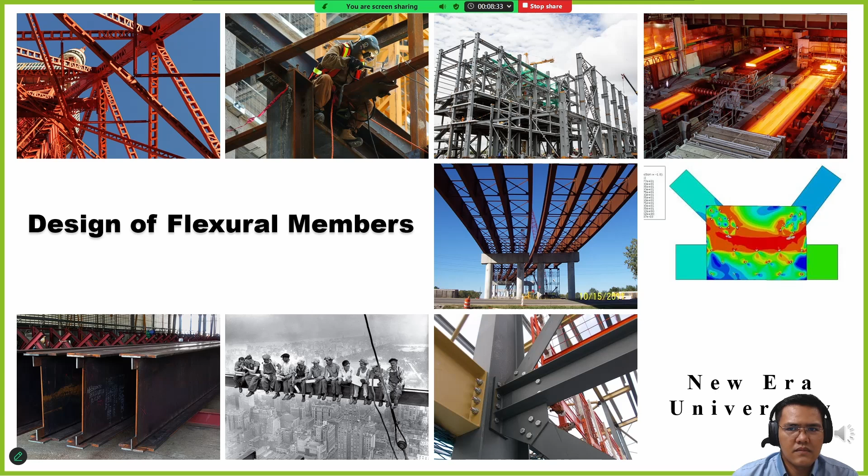Okay, design of flexural members, these are our learning outcomes for today: differentiate the elastic and plastic analysis, classify a given section as compact, non-compact, or slender section, understand the different limit states for flexure or modes of failure, calculate flexural strength considering bending at major axis, bending at minor axis, and the combination which we call biaxial bending. Also, we would try to calculate shear strength of a beam and do some serviceability check, which is a deflection check for a given beam.

As mentioned, this topic is quite long, so we would divide it into two sessions. Part 1 would possibly cover up to major bending, flexural strength considering bending at major axis.

So let's go to the code provisions. In terms of NSCP 2015, design of flexural members was presented in section 506. These are the different provisions or subsections included in this section. As you can see, there are many, and it was annexed depending on the section or shape, and on which reference axis you will bend.

For example, on 506.2, it says doubly symmetric compact I-shaped members. So your section must be doubly symmetric, I-shaped members and channel, applicable too, but bent about their major axis. For other examples, point 7 is square and rectangular hollow section, while point 6 is bent at minor axis. That's how it's defined in the NSCP code provision.

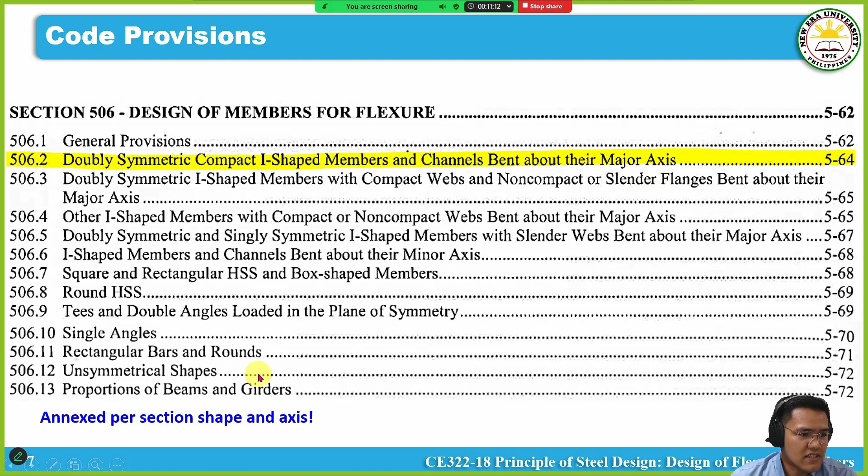Now, to simplify our discussion, so we can finish quickly, we would focus mainly on 506.2, which is doubly symmetric, compact I-shaped members and channel bent about their major axis. In particular, we will focus on W-shapes since that's the one usually used.

Now we have a table here showing, as a guide for designers, what provision applies. This is like a summary of the table of contents we showed earlier. You can see on 506.2, there's I-shaped channel, with description in terms of slenderness of flange and web, and there's a limit state that you should check.

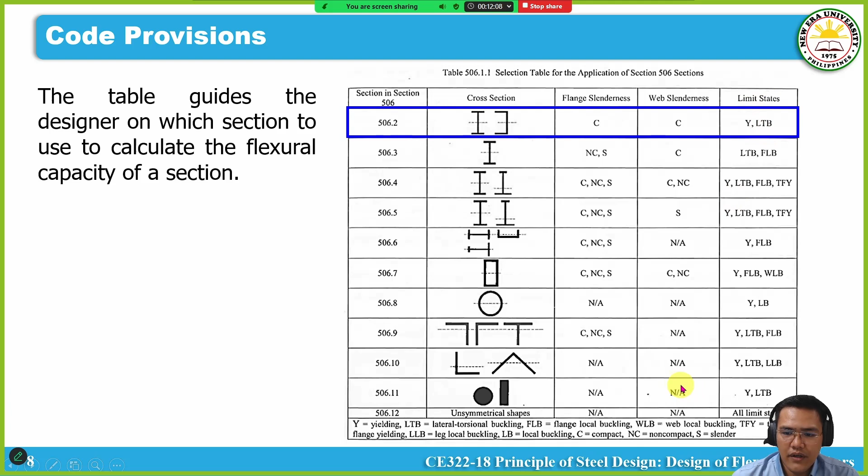So it appears that for 506.2, the flange must be C, which means compact, and the section must be both compact, and the limit state that needs to be considered when checking under 506.2 is Y, which corresponds to yielding failure, and LTB or lateral torsional buckling. We will discuss and detail this topic later.

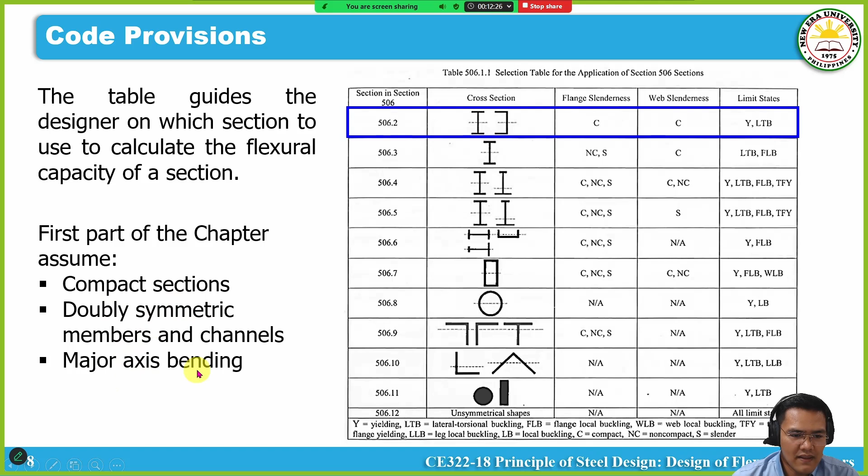So let me repeat: our assumption for this first part of the chapter is compact section, doubly symmetric members, bending would be on major axis.

In terms of shear, although in this second part it was included in section 507, it follows right after. These are the included provisions on checking against shear.

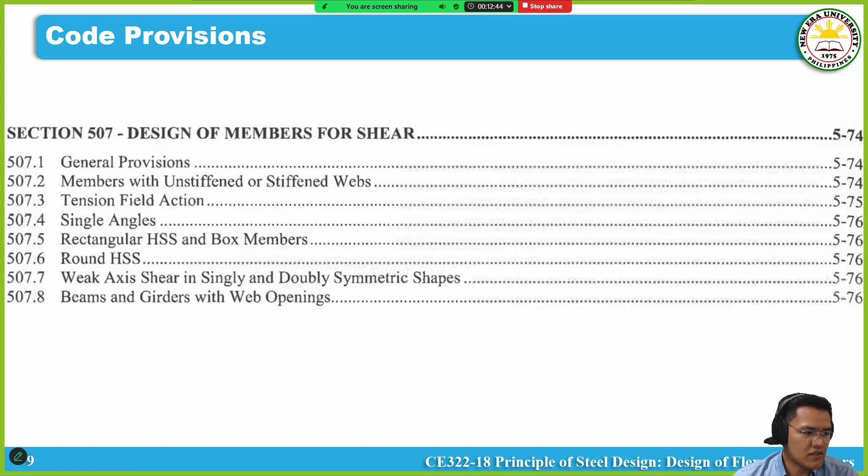Now let's go to bending at major axis. So beams as a flexural member, for example we have a simply supported beam with any random load applied. The usual case is you have moments and you have shear. So it is usually appropriate that when you design a beam, you design it not just against bending but also on shear.

And the beam, as a basic definition, is a structural member that usually supports transverse loads. Meaning if the longitudinal axis is in this direction, the loads are applied perpendicular to the longitudinal axis of your structural member. Usually, it's subjected primarily to flexure or bending.

Now, we have mentioned in the past chapter that it's not only bending that can be possibly subjected to our structural elements. It can also be introduced to axial load, in which case we call it a beam column. So we also have a specific chapter for beam column. But for now, just to emphasize, we would discuss pure bending or pure flexure in this chapter. So moment alone or shear alone is our checking for now.

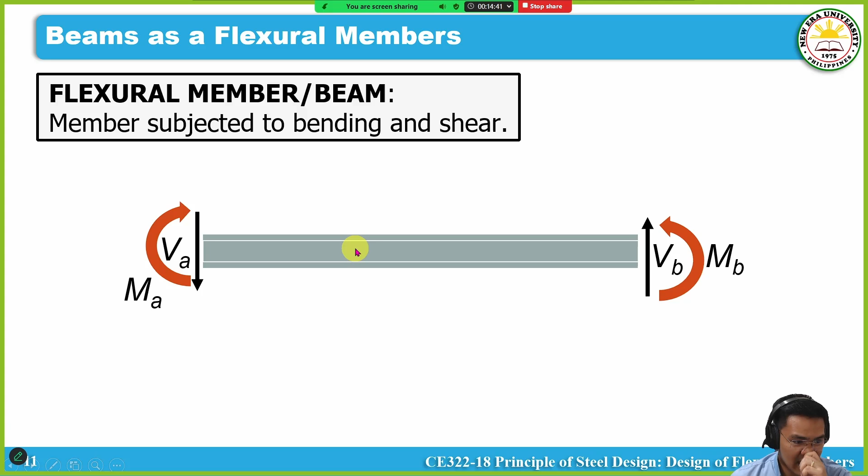Now, there's a lot of terminology that's used interchangeably with beams, but these are the usual terms we use. It depends on the function. So for example, girders are basically beams supported by columns, and usually girders support our secondary beams.

We also have joists, like in trusses. Stringers are used in stairs - the inclined structural members supporting the steps are called stringers. Lintels are for openings in building structures, like doors and windows, so we usually place beams there to carry our CHB walls.

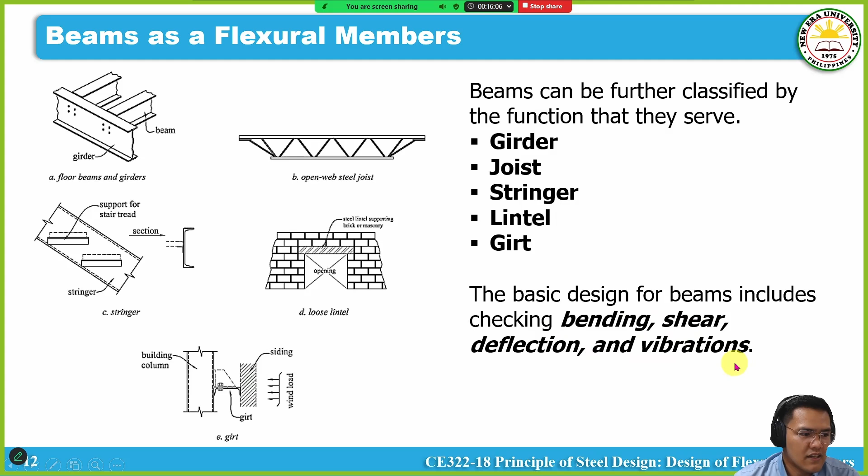Now, as we have mentioned, we would focus on W-shaped sections - the AISC rolled section. It has advantages if we use this as a beam, mainly because it has a lower cost compared with the built-up section, primarily due to additional fabrication cost - you'd have to weld built-up sections since they use plates. It's usually used for flexural members and for axial members.

There are cases with combined axial and bending, so you can also use it for columns. Basically the section is doubly symmetrical, with a strong x-axis and a weak y-axis - our wide W shape section.

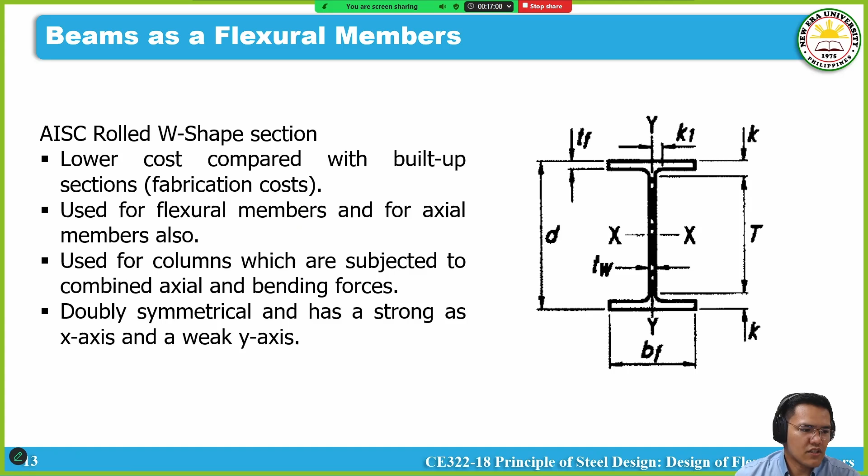Now, in terms of analysis, we have two usual approaches: elastic analysis and plastic analysis. Going back to the stress-strain diagram we discussed, the first part, which is under the elastic region, is usually what was discussed to you, and even the analysis in your lower subjects falls into elastic analysis.

Basically the assumption in the theory is that the stresses acting on your members are limited to the yield stress, FY. So once FY is reached in your system, that's it - it stops there.

But in reality, you can still add more load - it's not yet collapsed or at its ultimate, not yet the end of the world. You can still add load. So when you add load after this elastic region, you fall into a plastic or inelastic region.

So the counterpart of that would be plastic analysis - if you use what we call the maximum possible, or mobilize the reserve strength of the section. Usually you can add 20% more than the load applied to reach the yield stress limit. That's what happens in plastic analysis.

Another term here is collapse mechanism, wherein you continuously add loads such that the capacity of your structural system, or any component of it, would collapse. Usually it would form what we call a plastic hinge. So it's not just limited to FY - you can add additional load to mobilize the reserve strength of the given section until all fibers yield.

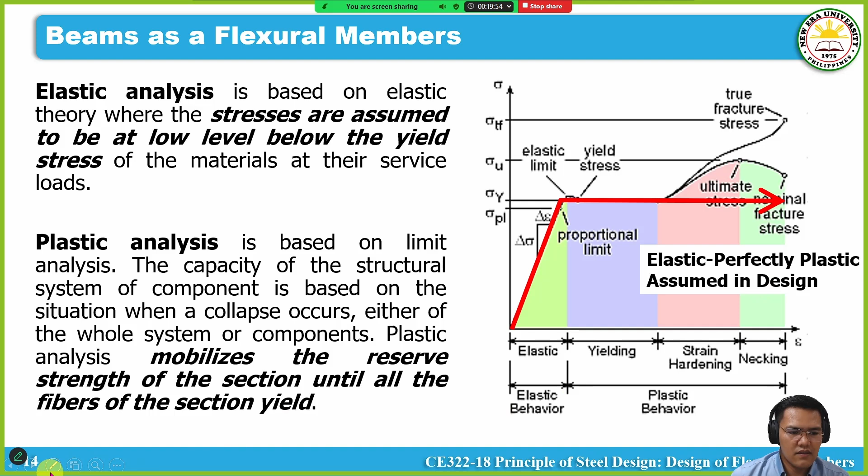Now, to better understand the difference between elastic and plastic analysis, which would be the basis of our design in flexural members, we need to discuss this slide. So say for example you have a simply supported beam, and you have any random load applied on top of your beam. What happens is you'll get stresses, or moments, acting on a given section - say for example you have a random section like this.

On elastic analysis, what happens is if you try to draw the stress and strain distribution on the given section, this is what you'd expect to see - something like this.

For example, for the stress distribution, the top fiber or from the elastic neutral axis, the counterpart of that is the centroid of our given section. For elastic analysis, once we reach the Fy, the yield stress of the steel, regardless of which fiber yields first, top or bottom, in elastic analysis that's it, the analysis stops there.

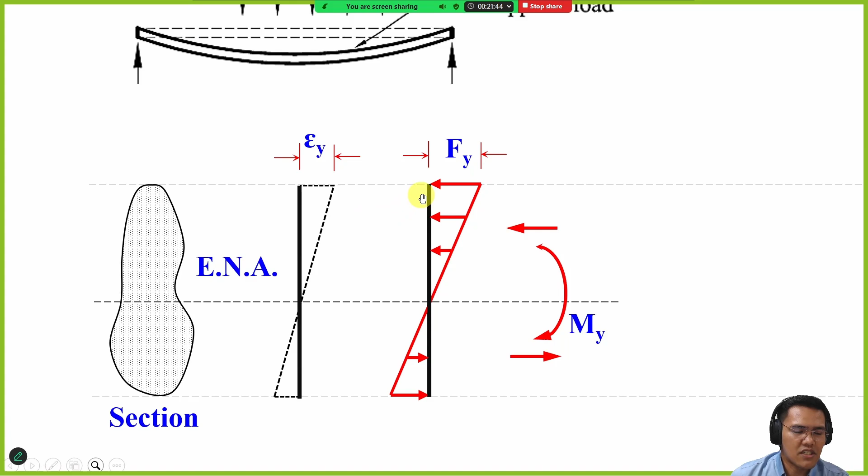But in reality, as we've mentioned, you can still push it further, that's not yet the actual limit of the system. So it's appropriate that for our subject, we usually use the flexure formula, F sub B equals MC over I, which is also equal to M over S using the section modulus. Basically, we equate this actual stress to the yield stress of the steel, since that is our limit.

So that's what happens in elastic analysis. It's also appropriate, since we're in elastic analysis, to call our moment the elastic moment, or in other books called M sub Y, our internal couple on this stress distribution.

Now let's compare our elastic analysis and plastic analysis. Say for example I add more load to our beam, this would be the representation of our strain and stress distribution. You can see the strain continuously grows linearly, while Fy stays constant since the section has already yielded, but that's the limit, it won't increase further because that's all the section can carry. So from this line, it's like it rotates clockwise. That's in between elastic and plastic analysis.

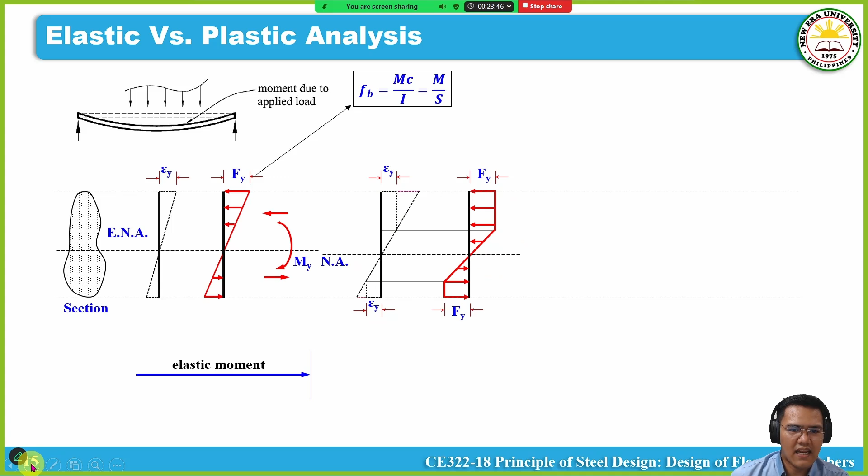Now let's show our plastic analysis. You can still add more load since not the entire section's fibers have yielded yet. You can see only up to that fiber has yielded. Now there's a point where you add more load such that all sections yield, and as mentioned, that's the limit of Fy. So the stress distribution rotates clockwise, from this one to this one, until it becomes a straight line. This is our stress distribution for plastic analysis.

And once you reach this stage, you would need to introduce what's called a plastic hinge into your system. Usually in this type of system, this happens possibly at the midspan, where the entire section has already yielded. This is what we call plastic analysis.

I want to emphasize, regarding elastic analysis, since other textbooks call this the yield moment MY, the moment that causes one of the fibers to yield elastically. So we have this formula from this equation. Going back to the flexure formula, if we want to get the moment, we just multiply the stress by the section modulus, but that stress is limited only by Fy. So basically that's it. One thing I want to emphasize: the section modulus we're using here is elastic, that's why we call it the elastic section modulus.

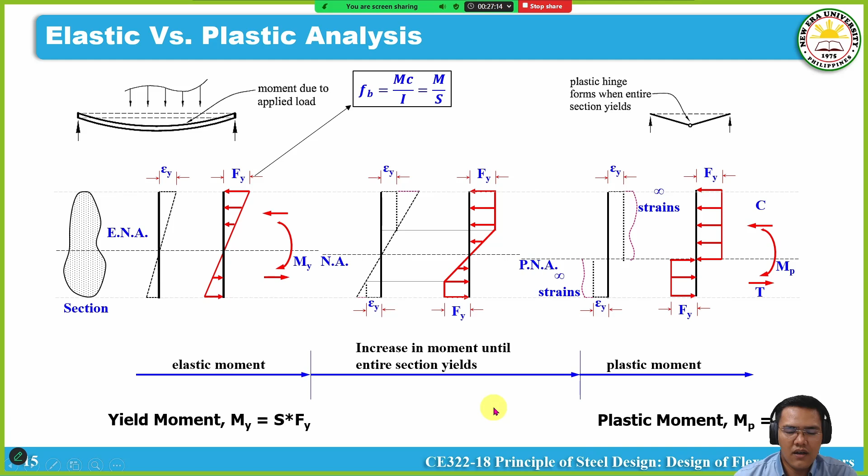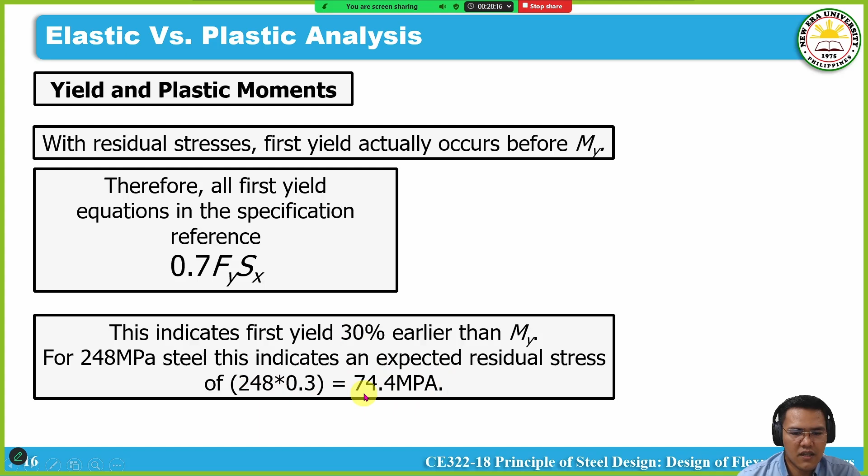May effect kasi yung residual stress sa ating calculation as we discussed last chapter. Ang ginagawa ni code, supposedly ito yung formula natin for yield moment, elastic section modulus times Fy. Para i-account ang residual stress, they would only use 70% of that equation. Sa ibang book tinatawag nila tong M sub R, ito talaga yung pinaka preferred series of equations na ginagamit sa AISC at sa NSCP. So halimbawa, kung 248 yung Fy mo, meron kang expected residual stress na 0.3 times 248, which is 74.4 MPa.

Ngayon, let's discuss limit state for flexure. Similar sa ibang topic on flexure, meron tayong mga mode of failure na kailangang i-discuss. Ito yung usual na tatlo: yung yielding, which is pinakita natin kanina sa elastic and plastic analysis slide. Ito sana yung gusto nating mangyari, wherein na-reach natin yung maximum possible moment dun sa ating system. Na-discuss natin yon, that is under plastic analysis, yung ating plastic moment. That's the maximum possible moment. Unfortunately, hindi mangyayari yon kasi meron tayong dalawang other mode of failure, yung tinatawag nating local buckling.

LB or local buckling, and lateral torsional buckling, LTB. Supposedly, itong yielding yung ideal, pero hindi nangyari due to this phenomenon, or the stability, parang similar sa chapter 4 sa design of compression members. Hindi talaga na-achieve yung maximum possible load na kayang buhatin ng columns mo kasi pag masyadong mahaba na siya, nagpipail na siya due to buckling. So yung tinatawag nating premature failure. Ito yung counterpart doon sa beams. So we need to check itong dalawang mode of failure na to aside from the yielding.

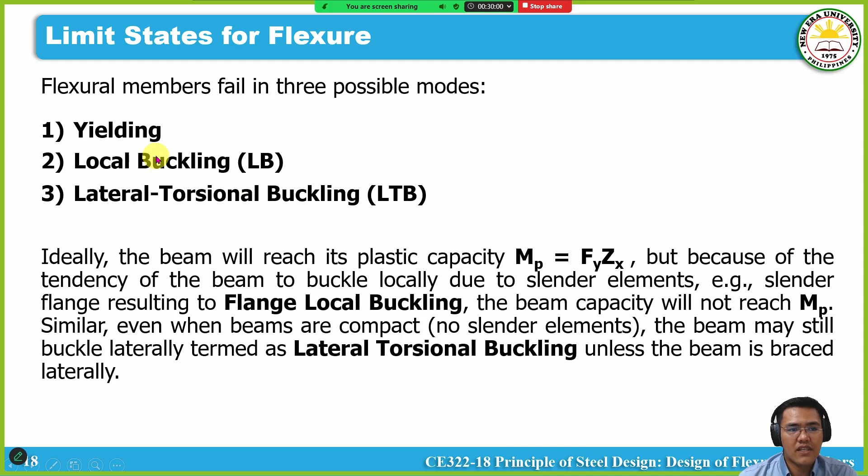Punta muna tayo kay yielding, limit state number 1. Sa yielding failure, ito na rin yung pinakita ko kanina sa plastic analysis, wherein ito yung desirable, we need to achieve the maximum possible moment, MP, and all the sections on your system were already stressed, or it already reached yung yield stress F sub Y. And the nominal moment capacity as per this mode of failure is the plastic moment MP, which is equal to Z sub X times F sub Y. Ngayon, hindi siya mangyayari kasi meron tayong two modes of failure that cause premature failure. Itong dalawa. So discuss natin yon.

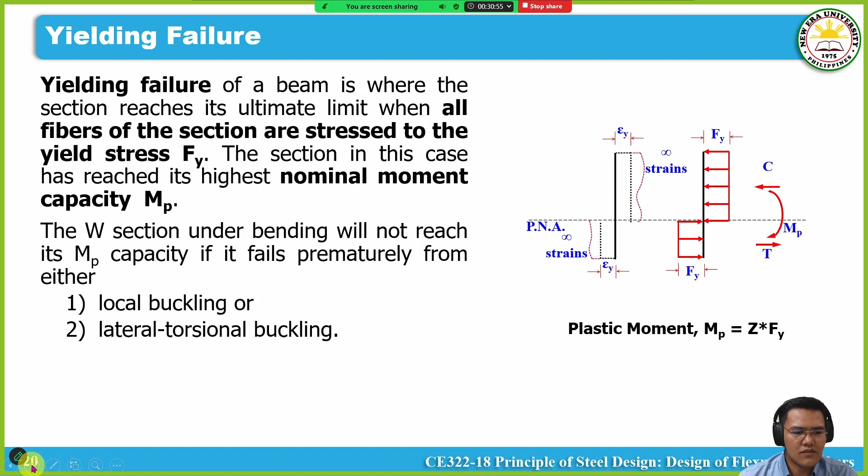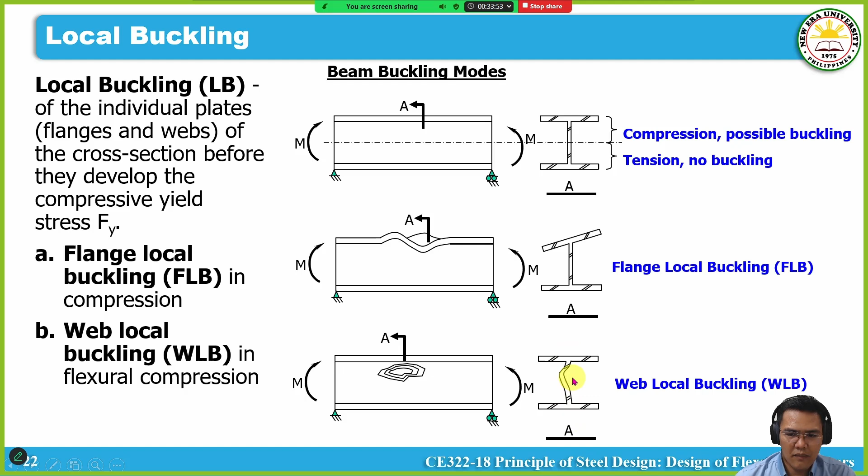Similarly, yung web local buckling naman, ito yung pinaka-elevation mo. Possibly magkakaroon ka ng deformation dito. If you would check the section view, ito yung makita mo. Nag-buckle na din yung pinaka-web mo. So what we call the web local buckling.

Since we're talking about buckling, it's appropriate lamang na we need to discuss yung tinatawag na slenderness ratio. And in terms of local buckling, usually we based on what we call plate buckling theory, we usually calculate the width to thickness ratio. Nire-relate natin siya sa slenderness ratio kasi compression tayo, compression mode of failure tayo.

So say for example, mag-focus tayo on local buckling dun sa flange. Kung i-observe natin yung flange natin, restrained basically by the web on one edge. So for example, let's take some specimen dun sa ating web, nagbuckle, o flange na nagbuckle. We would have this figure, parang siya ang representation niya is cantilever beam.

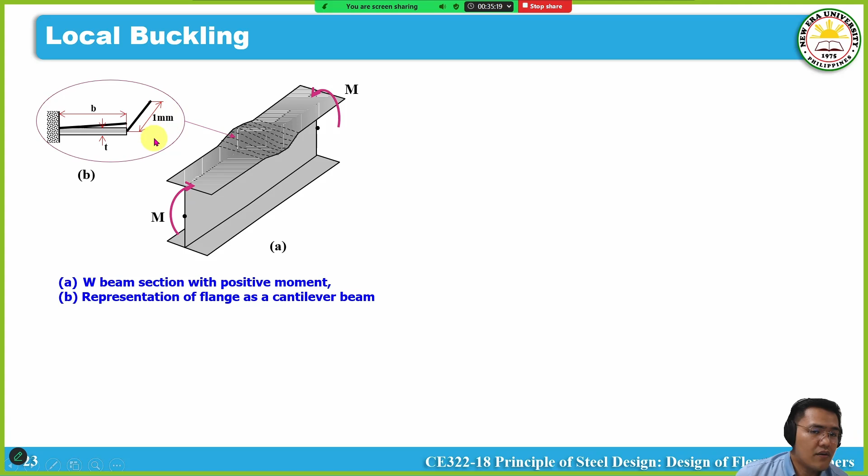At let's assume na meron tayong 1 millimeter unit width on our analysis. So yung projecting flange na yan, as I mentioned, is like a cantilever, at usually tinatawag natin yan or considered natin yan as unstiffened element. Unstiffened, parang kasi siya, isang member lang yung nakasupport sa kanya. So naglagay tayo ng moment dyan, and it would have a local web or flange local buckling like so.

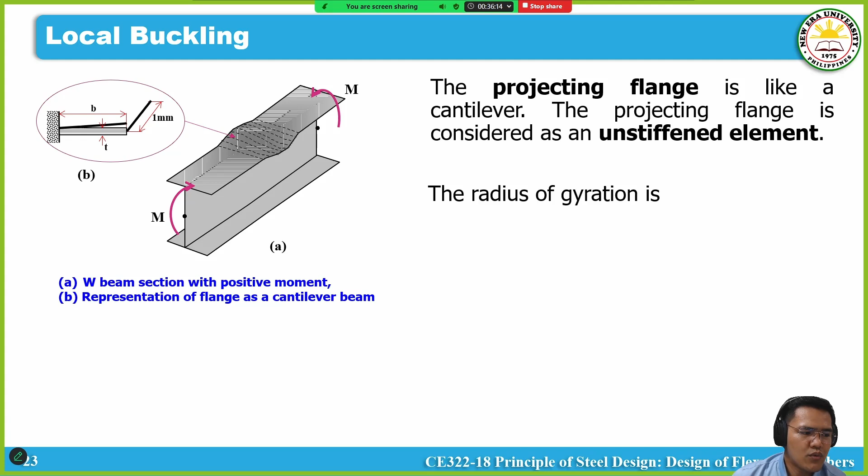And if we would calculate yung ating slenderness ratio, slenderness ratio on chapter 4 is simply L over R. Now if we would relate ito sa local buckling, it's appropriate lang na mag-focus tayo dun sa radius of gyration. And if we would calculate yung radius of gyration to check yung ating slenderness ratio, the radius of gyration is simply square root of I over A.

I over A. So if we would relate dito sa sample natin, on our projecting flange, na meron kang total length na B, at meron ka namang depth na T, o yung thickness ng flange, with the unit width. Imagine mo na yan, cantilever beam yan, with a unit width of 1 millimeter. Pag kinalculate mo tong moment of inertia of this system, basically rectangular section lang to, that is BH cube over 12.

So on this system, yung base mo is yung 1 millimeter, yung depth mo is yung thickness, divided by 12. Divided by area, which is simply the depth o yung thickness mo times yung width mo o yung 1 millimeter. Ito yun, so simplify mo yan, ma-cancel out yung T dito, so maging T squared, tapos may square root, so matitira is T.

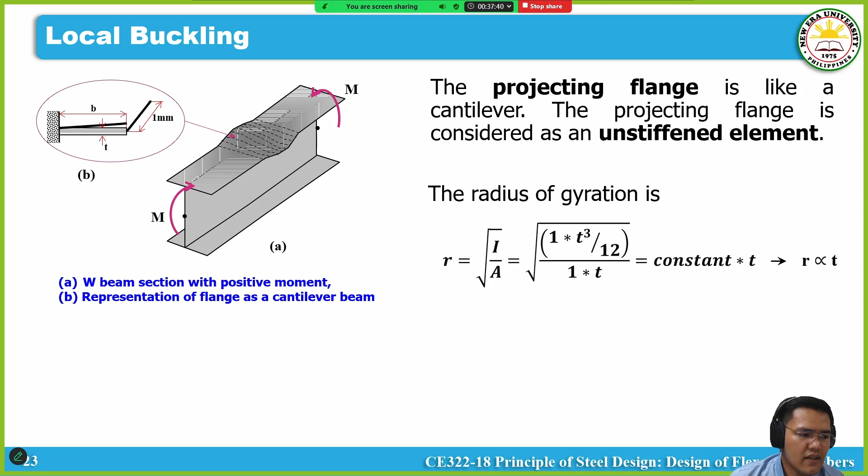At then may mga numbers ka dyan, so whatever number na yun, let's assume that's a constant number. At therefore, we could conclude na yung R natin is basically proportional with the thickness. At therefore, kung babalikan natin yung calculation ng slenderness ratio, which is L over R, we would relate dito sa system natin, yung length ng ating parang pinaka-column is yung distance B, at yung radius of gyration as per column, R yun. Sabi natin yung R natin is somehow proportional to T, o yung thickness natin, it would give you the representation of slenderness ratio for this flange.

At tinatawag natin siyang width to thickness ratio, on local buckling. So basically ito lang yung ano natin, yung width to thickness ratio. At it would give you the slenderness nung flange mo and web, which is as we have mentioned, expressed in terms of the B over T ratio.

Okay, now in terms of the wide flange, kung i-relate natin itong figure na to, yung B na yan, basically ano yun, from pinaka gitna ng ating web to pinaka end ng ating flange.

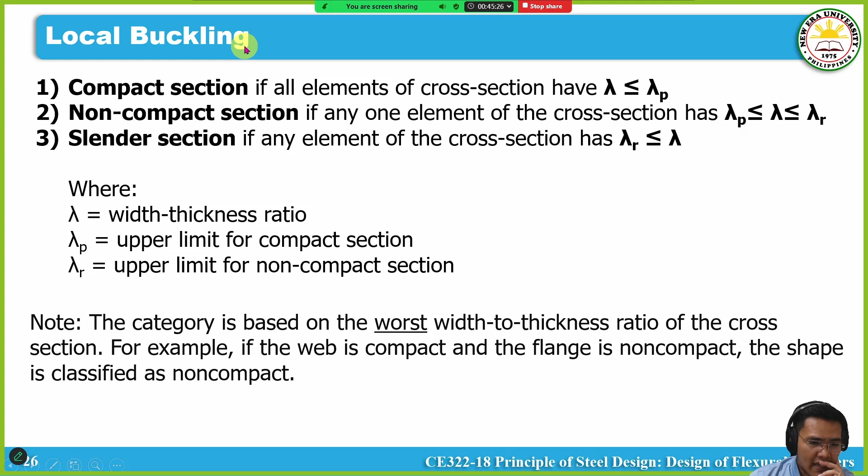Ibig sabihin kapag slender section ka, you would not develop the plastic moment, which is the maximum possible moment dun sa system mo due to elastic local buckling. At kapag non-compact section ka naman, you would develop MY or the yield moment, but not the plastic moment before local buckling would happen. At lastly, compact section, ito lang daw yung section na mag-de-develop ng plastic moment MP.

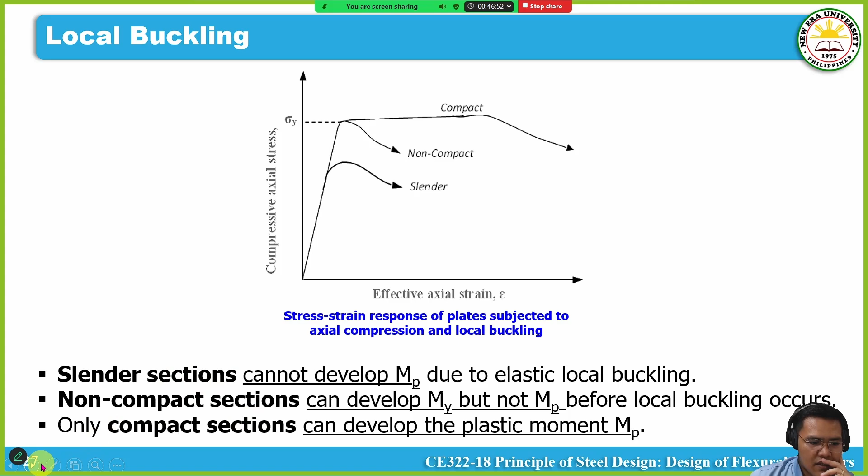So we were just relating yung ating stresses with the strain considering these three categories ng section natin under local buckling criteria. Now, sinabi ko kanina yung table from NSCP.

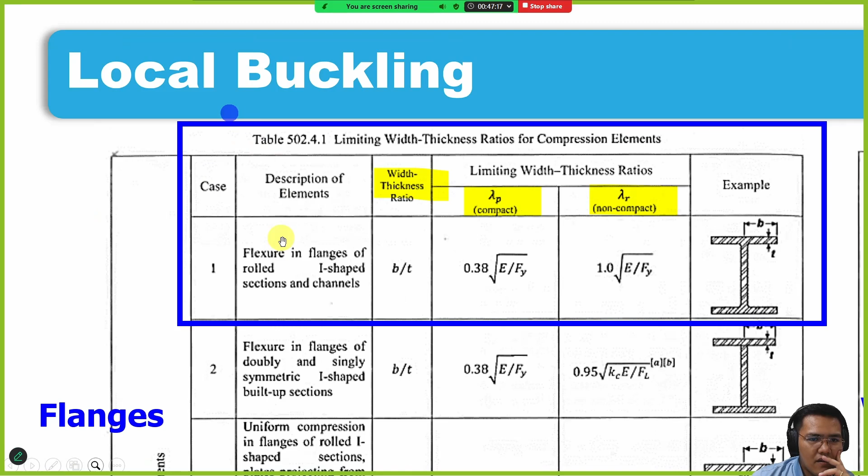Na gagamitin natin for comparison, yung series of equation na i-compare natin yung actual width to thickness ratio. Itong table 502.4.1, which is the limiting width to thickness ratio for compression elements. Malinaw dito na sinabi, unstiffened elements, which is alam natin, this is for flange. Sinabi niya, yung width to thickness ratio daw, B over T, i-compare mo with this limiting width to thickness ratio. Ito yung mga limit.

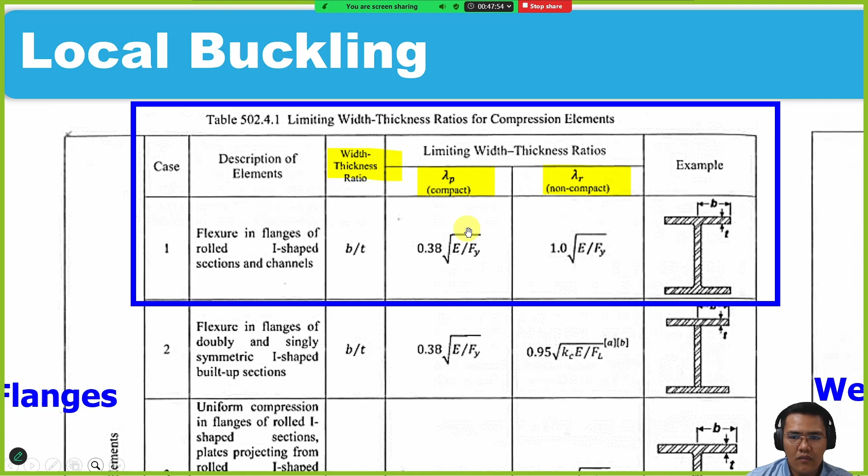So yung lambda sub P, for a compact section, ito yun, 0.38 square root of E over Fy. At para sa non-compact section naman, yung lambda sub R mo is 1.0 square root of E over Fy. Ito yung mga gagamitin natin para malaman natin kung compact, non-compact, or slender yung ating given section.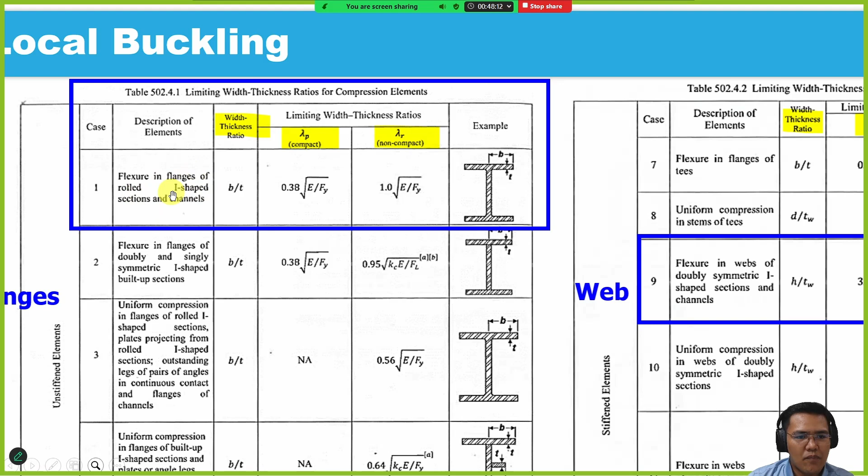Ito yung for flange. For web naman, which is the stiffened element, itong kasunod na table, which is itong criteria na to. Gusto ko lang i-emphasize, flexure in flange of a rolled I-shaped section and channel, so applicable yung wide flange. In terms of stiffened element, yung web nga, ito yung case 9, which is flexure in webs of doubly symmetric I-shaped section and channel.

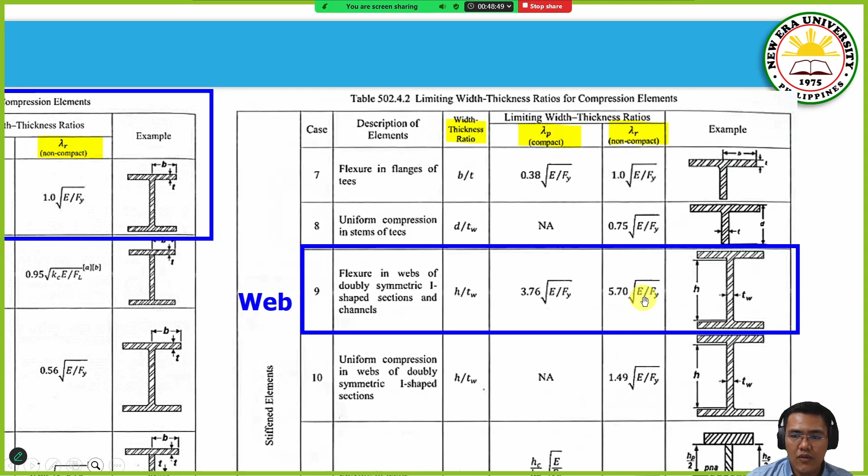Na-derive na natin to, ito yung formula natin for the actual width to thickness ratio. Ito naman yung equation natin for lambda sub P, which is for compact section, 3.76 the square root of E over Fy, and ito yung for non-compact section, lambda sub R, 5.7 square root of E over F sub Y. Gusto ko lang i-emphasize na yung mga lambda mo is a function of your E and F sub Y. So usually, pwede mong baguhin dito yung steel grade mo to modify yung mga equations mo dito.

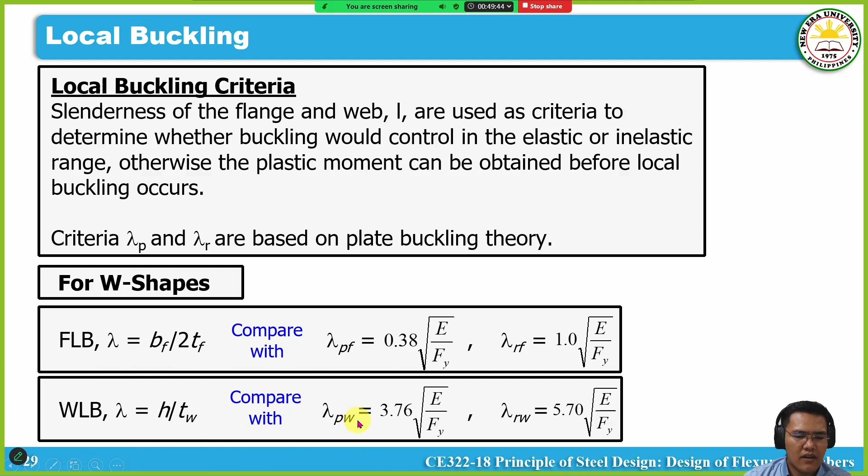Okay, to summarize again, for W shape, kukunin mo yung in terms of the flange local buckling, kunin mo yung actual lambda, ito yung equation, and you need to compare with this two sets of equations kung compact ka ba o non-compact. Kapag web local buckling naman, kunin mo yung lambda, which is the equation, i-compare mo with the actual limiting width to thickness ratio. So ito yung for compact, ito naman yung non-compact.

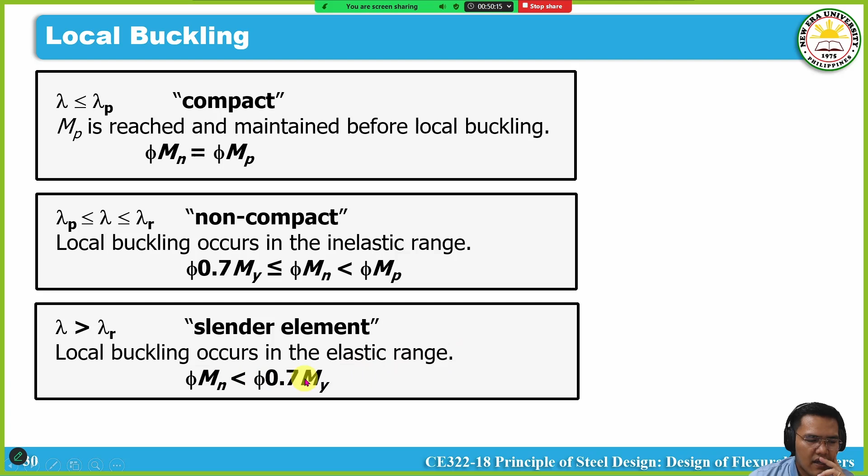In terms of stresses or moment, na-discuss na naman to kanina, kapag compact section, MP is reached and maintained before local buckling, so ito yung mga equations natin. For non-compact, local buckling would occur in the inelastic range, ito yung mga equations na gagamitin natin. At for slender element, local buckling would occur in the elastic range. By the way, for this chapter, we would focus on compact section as we have discussed.

Let's proceed to limit state number 3, which is lateral torsional buckling or LTB. For this part, let's try to show a video of lateral torsional buckling. I want you to observe, aside from the failure at the center due to LTB, the force versus displacement. This one is vertical displacement, and this one is horizontal displacement.

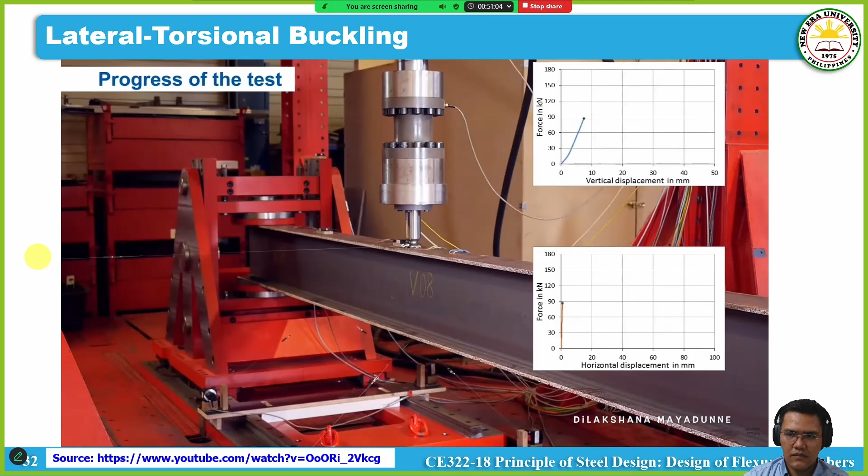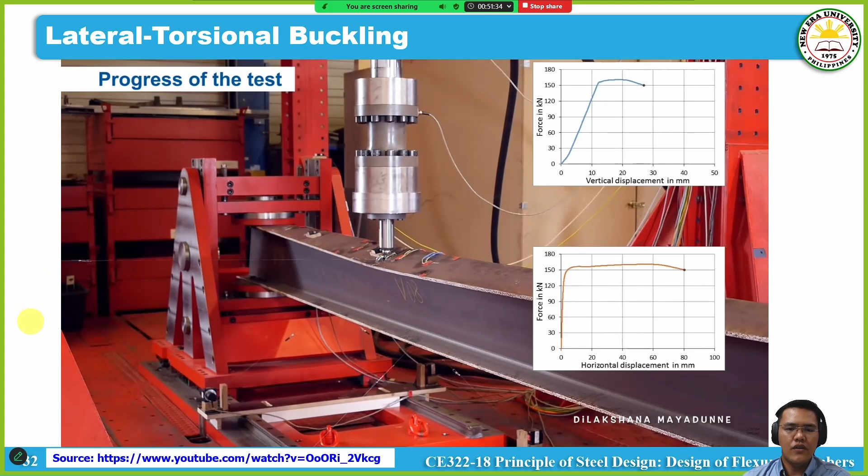Okay, that's close now, it's about to fail. Check the stress-strain diagram, sorry, the force and displacement diagram. You have a concentrated load at midspan, then out of nowhere it fails prematurely due to LTB. What you'll notice is that when LTB occurs, you deflect laterally and the section twists. That's what happened.

So again, you have a simply supported beam and you apply a load on top of it. What happens in LTB is when it fails due to lateral torsional buckling, you get a lateral displacement. This is the original section, and this is the final section - you get lateral displacement and torsional displacement, or the section twists. Looking at the top view versus the elevation, this is what you'll see.

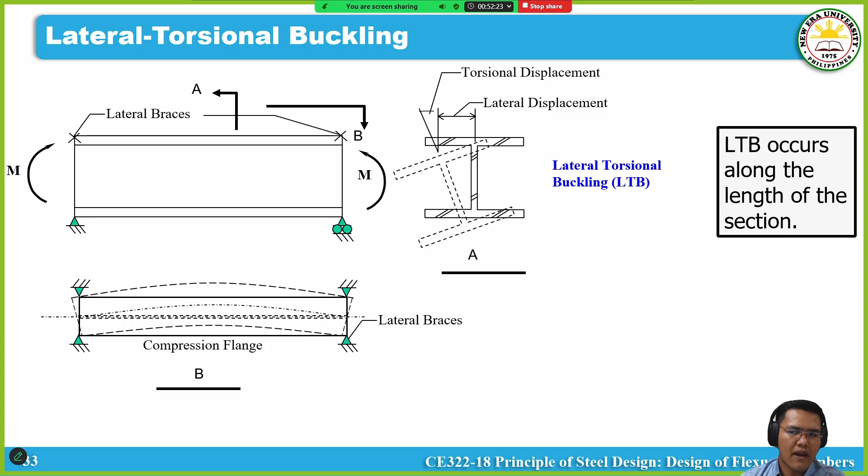To summarize, LTB occurs along the length of the section. The compression flange tries to buckle like a column, while the tension flange tries to stay in place. In effect, you get lateral movement at the compression flange and torsional twisting of the entire cross section. I want to emphasize that lateral torsional buckling only happens when bent about its strong axis - when bent on the minor axis, there's no LTB. It's only applicable to the strong axis.

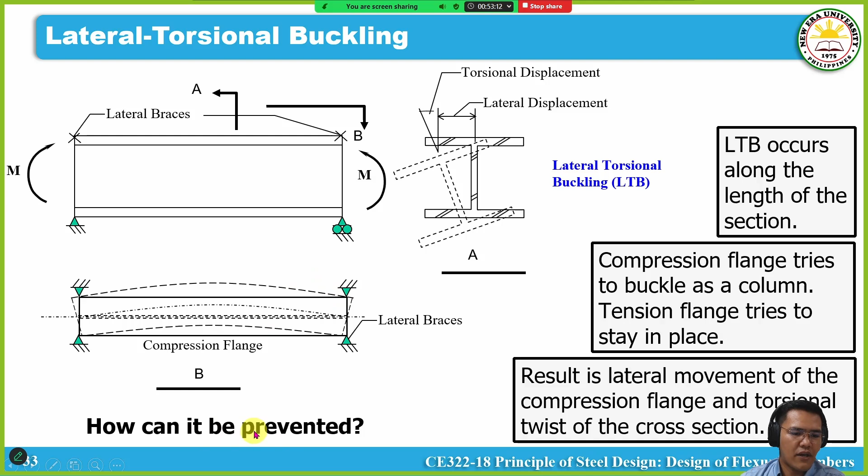Now the question is, we have this thing called LTB - how can it be prevented? Here are our solutions. We usually introduce what we call lateral bracing. So to prevent lateral torsional buckling for a given system, like this simply supported beam, assuming the beam is too long, to prevent LTB you just need to introduce lateral bracing. These crosses denote the lateral brace points, which would prevent the LTB.

I want to emphasize this distance - from lateral brace point to lateral brace point, that's called the unbraced length, LB, which is the basis of our calculations on this topic. The unsupported length here, from support to support of the beam, is the unbraced length. So usually the strategy is to introduce lateral bracing between the beam centroid and the compression flange to prevent LTB. That's our main solution.

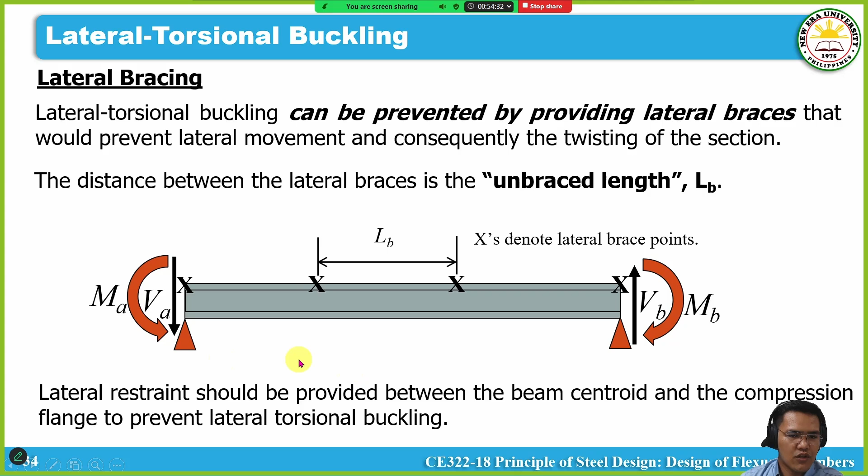We have two figures here to show the effect of LTB, with or without lateral bracing. In this figure, this is an ongoing construction of a steel girder bridge. You can see it has cross bracing installed, also called intermediate bracing, whose purpose is to prevent lateral torsional buckling. On the right hand side, this one is without bracing - you can see it buckled or peeled under lateral torsional buckling. That's how critical the use of bracing in our system is.

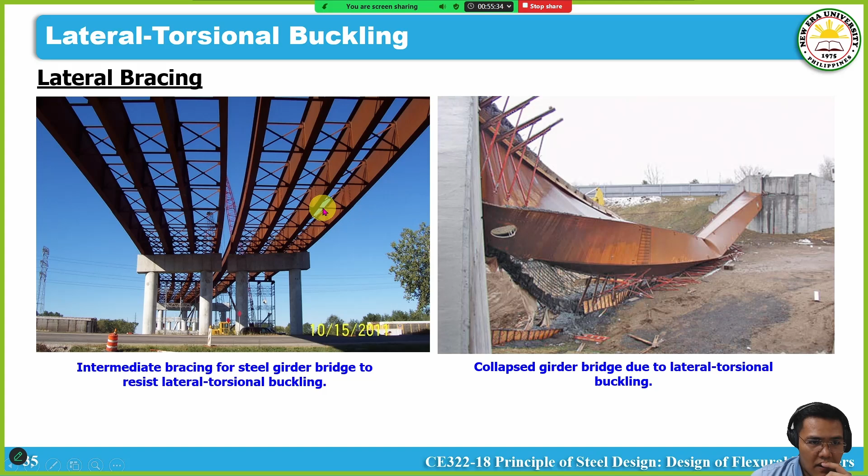In reality, the bridge failures you'll see online usually happen due to lateral torsional buckling, because they didn't introduce bracing. Now in terms of the capacity or strength of a given system, the nominal strength should be related to the definition of LB, or the lateral bracing spacing. Because how dense your bracing is on your beam will dictate your capacity. It makes sense - the denser your bracing, the higher your beam capacity possibly is. As your bracing spacing gets farther apart, you become more prone to failure due to lateral torsional buckling.

Okay, now the question is how do you calculate this? Because it's a function of your lateral brace, or unbraced length. So this is our main guide, on this figure, which basically shows the nominal moment strength versus the unbraced length.

So whatever the value of your unbraced length L sub B, you plot it here, then find the values of the limiting lengths, L sub P and L sub R. Then you compare it there and you'll know which case you fall under.

If you're case 1, meaning you would achieve plastic, the plastic case wherein you're in the plastic zone, you have no lateral torsional buckling there. So what happened is your bracing system is too dense, so you don't have lateral torsional buckling, and you would achieve the maximum possible moment, which is the plastic moment.

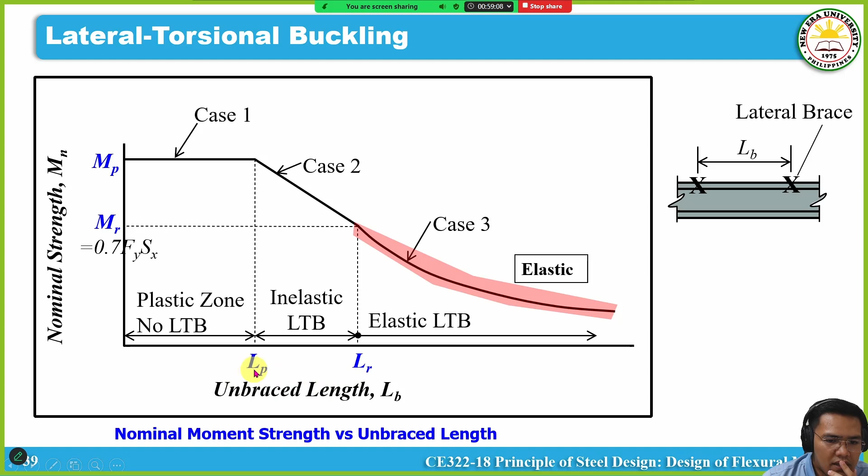So now let's define what LP and LR are, how to calculate them. The limiting length L sub P can be calculated as per the code, equal to 1.76 R sub y times the square root of E over Fy. We already know all this, nothing new there. So this is what it means.

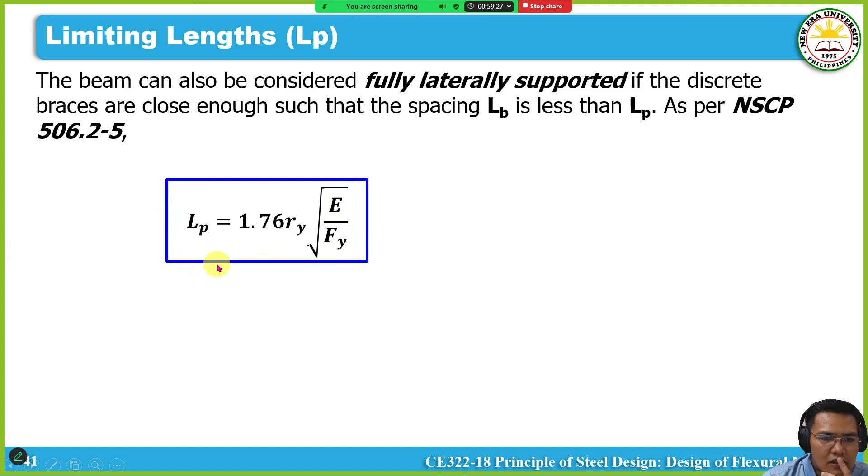Obviously when your L sub B, or the unbraced length, is less than L sub P, as per the figure we showed earlier, you have no torsional buckling. Now if it's the opposite, greater than your LP, you would have torsional buckling, meaning you already have torsional buckling.

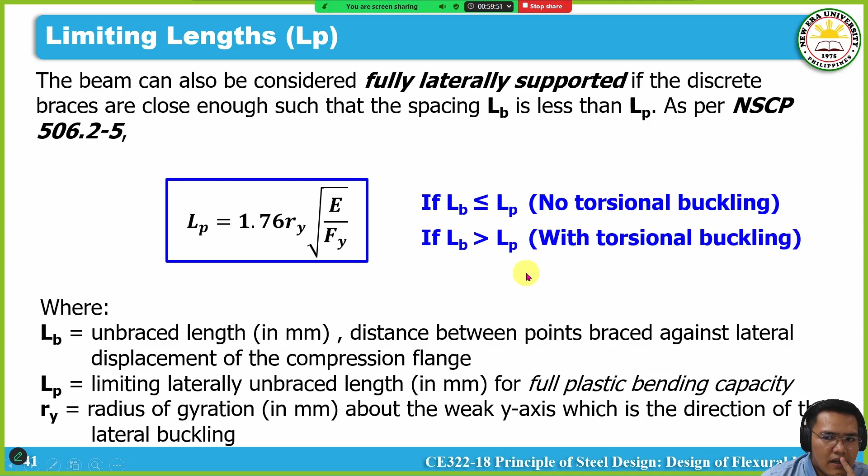Now the limiting length L sub R can be calculated by this equation: 1.95 R sub TS times E over 0.7 F sub Y, square root of JC — a separate parameter — over S sub X H sub O, square root of 1 plus square root of 1 plus 6.76 times (0.7 F sub Y over E, times S sub X H sub O over J sub C) squared. So it's quite long, actually this is the longest formula in steel design.

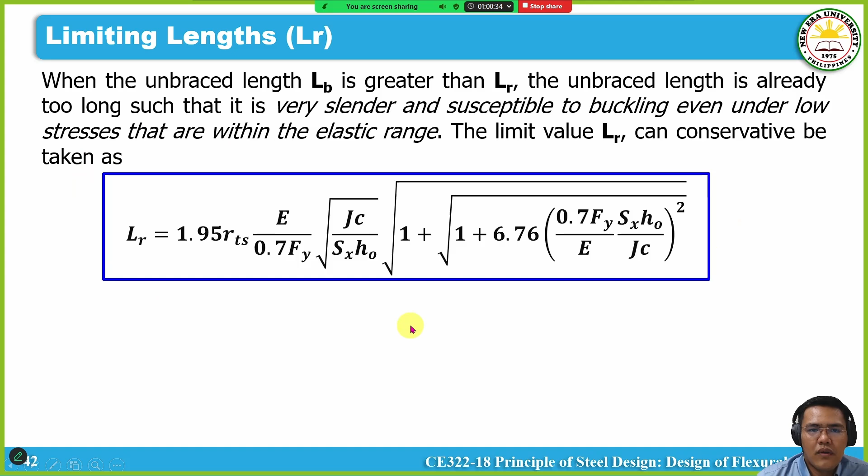So just memorize it, guys. You have no option but to memorize this L sub R. These are what the parameters mean. I want to emphasize the C. These are new parameters for us: R sub TS, which is the radius of gyration about the y-axis of the effective compression area. J is the torsional constant. The small letter C is equal to 1.0 for doubly symmetrical shapes like wide flange.

S sub X, alam nyo na to. H sub O, distance daw to, between the flange centroid, in millimeter.

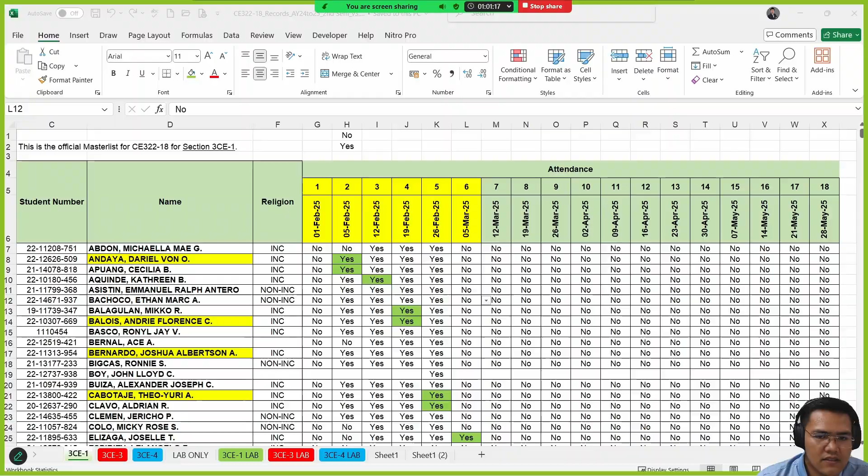Okay, so siguro para mas maganda, let's introduce ulit yung ating section database for wide flange. Ipakita natin yung given wide flange section kasi ang sabi dito on our PowerPoint, specifically for H, distance daw siya between flange centroid.

Flange centroid. So ito yung flange mo, yung centroid niya most likely would andito, which is 0.5 thickness of flange, yung location niya. Similarly, dito 0.5 thickness of flange. So yung definition ng H is distance between flange centroid. Okay, so yun lang yun, from that point to that point.

And it would be calculated by the distance D, yung total depth, minus 0.5 thickness of flange, minus 0.5 thickness of flange, or 1 thickness of flange. Ipakita ko lang yung ibang parameter, yung R sub TS.

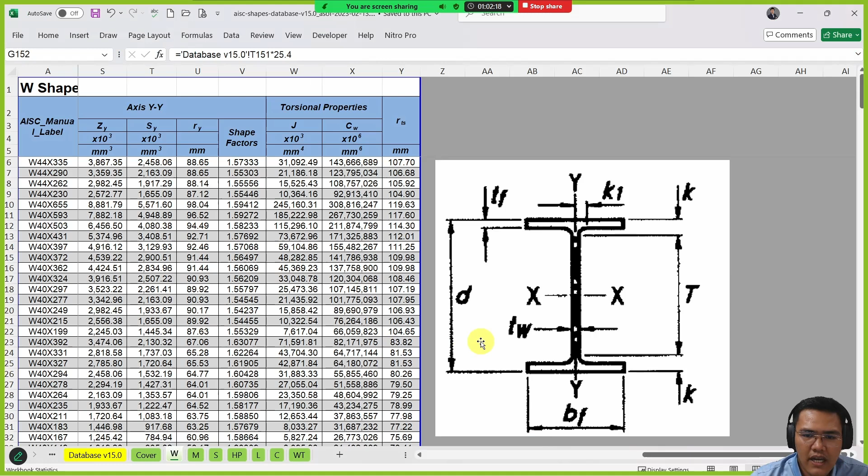Okay, pagdating sa database, andito siya, itong column na to. So whatever the wide flange section ang ma-select mo, halimbawa, 40 by 655.

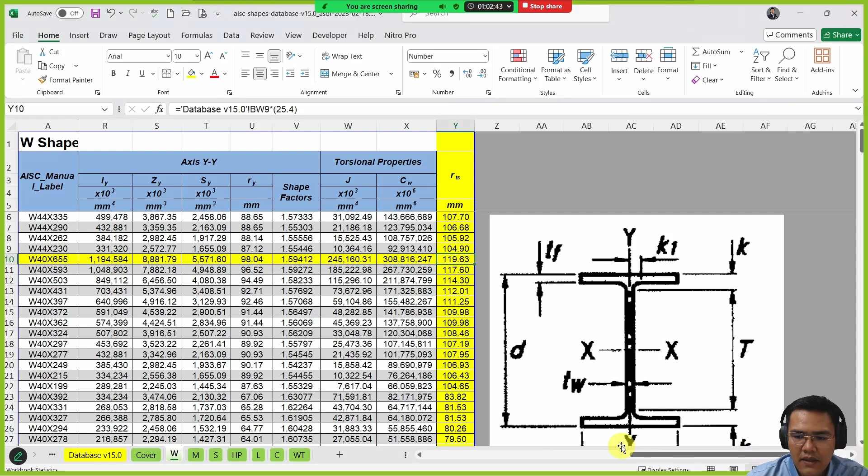So yun yung corresponding ano niya, R sub TS. Similarly, itong ibang parameters, halimbawa, itong elastic section modulus S sub X, dito mo siya makita pagdating sa database. Punta ka sa x-axis, ito, ayan, S sub X.

While yung plastic section modulus, Z sub X naman, at x-axis, ito naman yon. So ito yung corresponding value nila.

While yung other parameters, pakita na natin, yung J, torsional constant, ito naman yon. Nandito sa bandang last part, ito, torsional properties, itong J. Dito mo siya makakuha, so you would refer on this column.

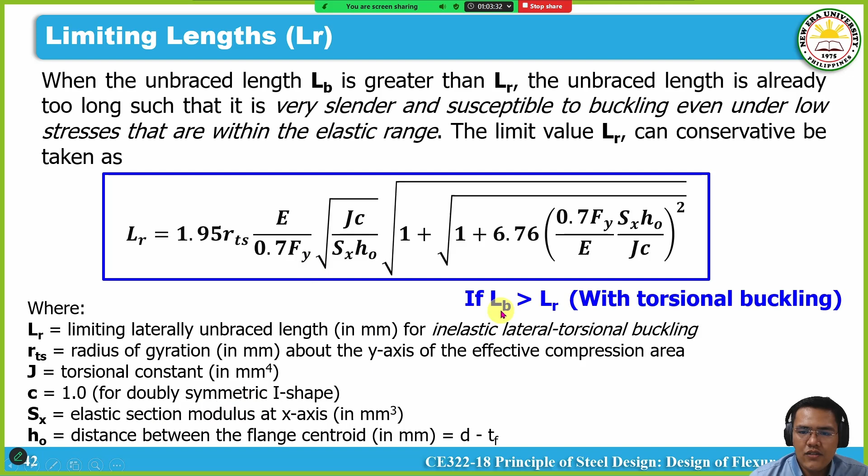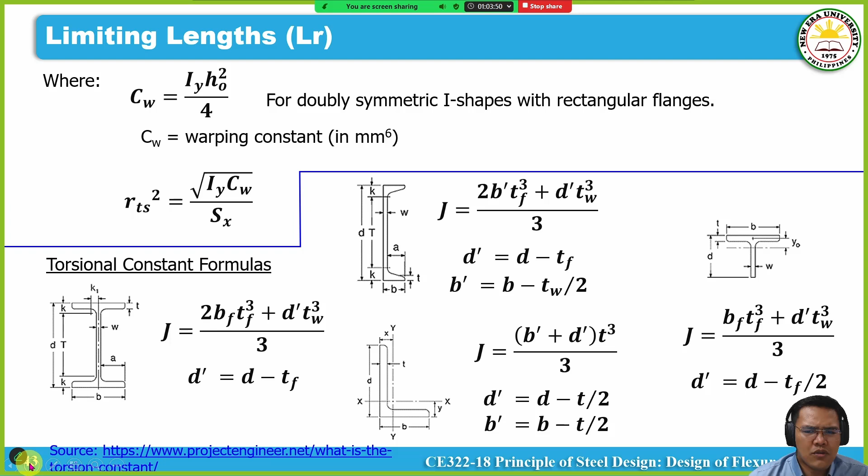Sige, napakita natin kung paano siya nakuha from the database. Basically, ang ibig sabihin lang niyan, kapag LB is greater than LR, meron kang torsional buckling. Ito yung iba't ibang section properties na pwede nyong gamitin depende sa given section, as a guide. So I would share it with you na lang, bahala na kayo, but most likely hindi natin gagamitin on our calculations.

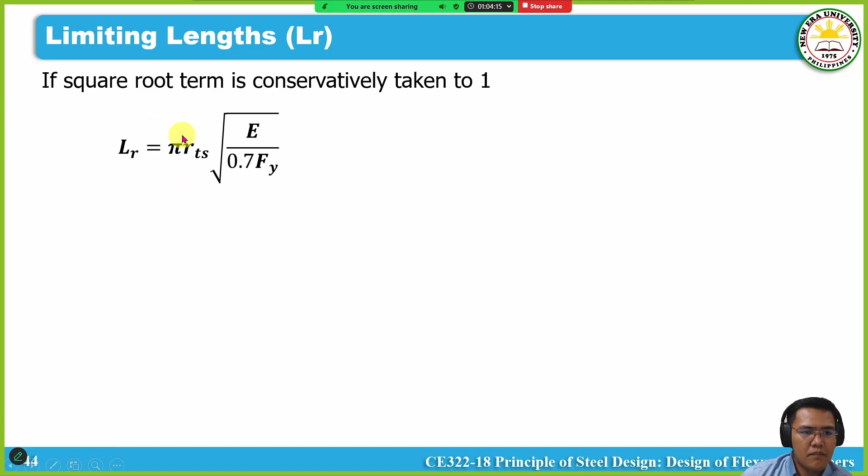Sa code, meron siyang isang option to use a shorter formula ni L sub R, which is ito, which is conservative kasi mas critical yung mga values na binibigay niya. So pag ito pinagamit sa board exam nyo, edi gamitin nyo. Pero on our discussion, you would use yung longer version ng L sub R. Okay, ito pinakita ko lang saan kinukuha si R sub TS.

Skip natin to. Ngayon sa mga cases kung saan you're using a built-up section, i-discuss lang natin paano kinukuha si R sub TS. Define siya as the radius of gyration about the y-axis, ito yung y-axis natin. Pero ano lang daw, from the effective compression area, so alam natin ito yung compression fibers natin na taas ng neutral axis.

Kunin mo lang daw yung 1/3 nun, yun yung 1/3 daw ng compression web. So ito yung compression web natin. Kunin mo yung 30% nun, yun yung compression. From that, include mo na yung compression flange. So lahat ng area na to naka-highlighted. Kunin mo yung moment of inertia niya, or yung section properties niya in terms of the radius of gyration with respect to y-axis.

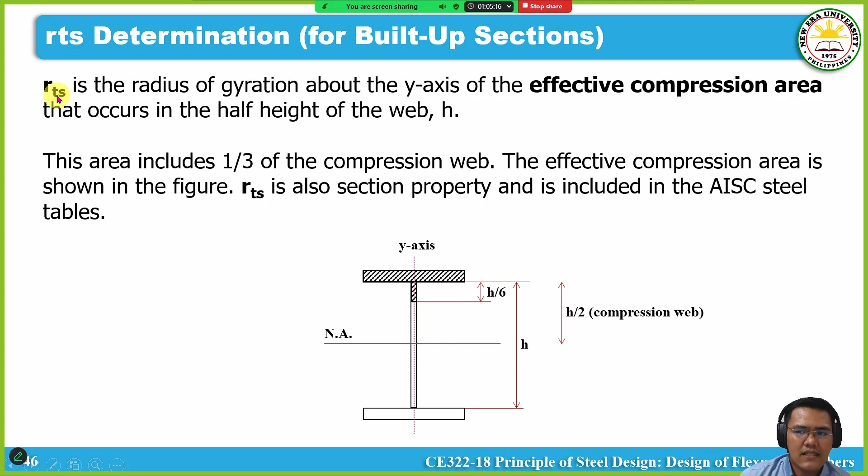So ganun daw dinidefine si R sub TS, which is sa case natin, pinakita natin sa database, naka-define naman siya kapag rolled W section yung ginamit mo. So, for built-up section to.

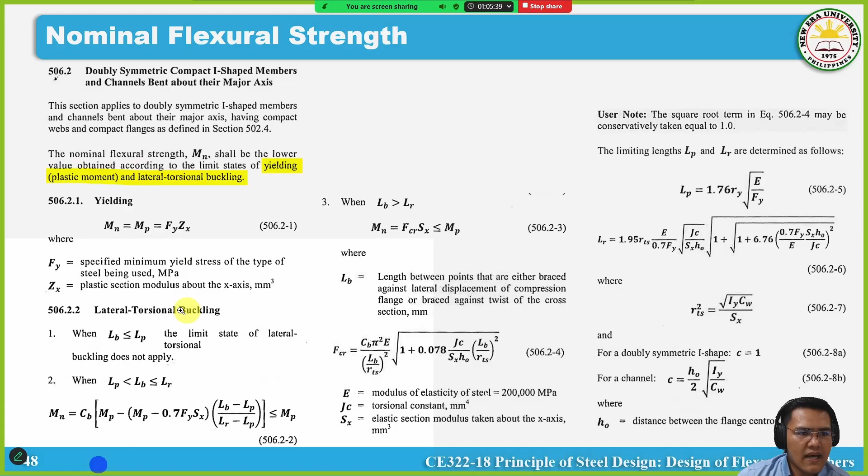Sige, nominal flexural strength, as per the code. Sabi natin, magpo-focus tayo on 506.2. Ito lang yung sinasabi ni 506.2. Medyo i-detail natin, although ipapakita natin mamaya yung mga formulas niyan. Ang sabi niya, kapag nag-fall ka kay 506.2, dalawang mode of failure lang yung kailangan mo i-check: yielding, which is ma-achieve mo yung maximum possible moment, the plastic moment, and lateral torsional buckling, LTB.

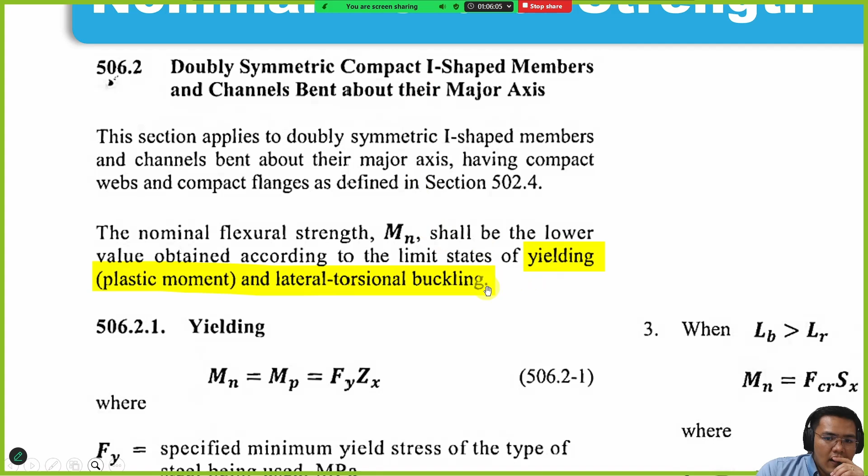So bakit? Kasi nga, compact section ka. Kapag sinabing compact, wala kang local buckling. Kaya ito lang yung dalawang limit state na pinapacheck niya. So ito yung formula for yielding, ito yung formula for lateral torsional buckling. Sige, skip na natin to and let's proceed dun sa mga PowerPoint. Yung case number 1 for nominal flexural strength, may pinakita ko sa inyo kaninang table showing yung nominal strength versus the unbraced length.

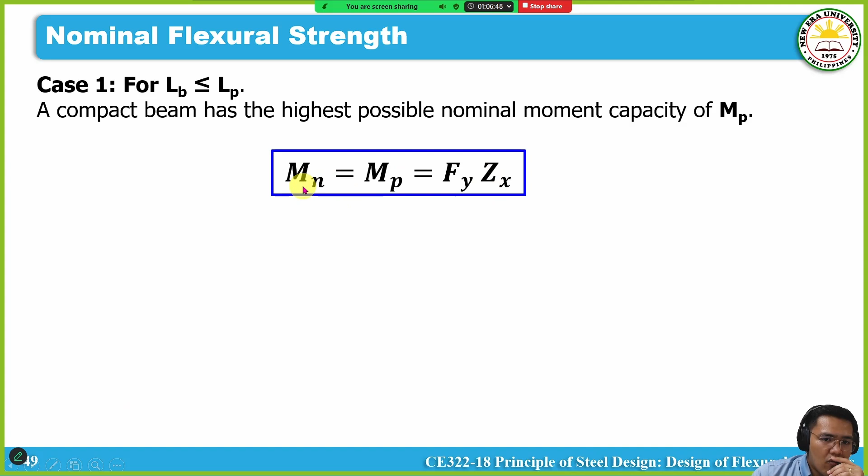Okay, case number 1: kapag yung L sub B mo is less than L sub P, ibig sabihin you have a compact beam, LTB or lateral torsional buckling is not applicable, you would achieve the maximum possible moment or nominal moment capacity, which is the M sub P. And the formula for the nominal moment is M sub P is equal to F sub Y times Z sub X. Alam niyo na yung mga definition, or ano yung ibig sabihin nun.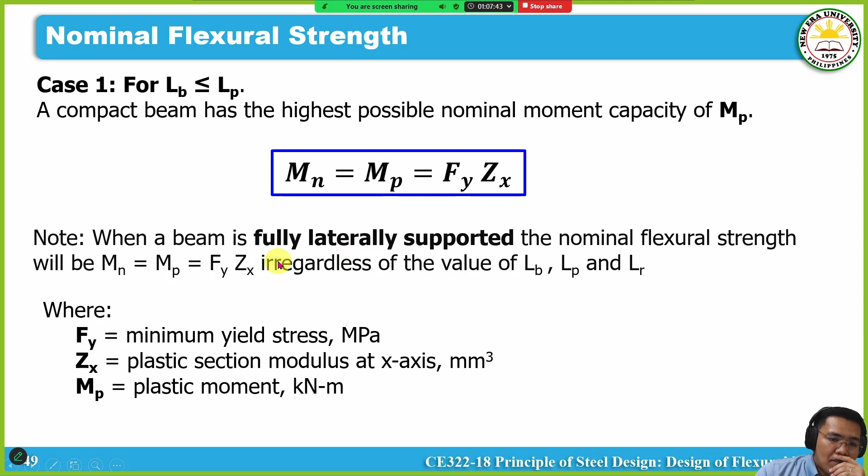Gusto ko lang i-emphasize, sa mga problem minsan hindi nila binibigay yung lengths, pero ang sinasabi nila, yung system mo daw is fully laterally supported. Kapag ito yung sinabi, matic yun, no question asked, hindi mo na kailangan i-calculate yung limiting lengths mo na L sub P, matic yun, you would fall into case 1 wherein you would develop the maximum possible moment, M sub P. Paki-take note na lang, yung ibang term dito na ginagamit kapag daw yung compression flange mo sa beam mo is naka-encase with concrete slab. Sa mga case na yun, walang lateral torsional buckling, so most likely applicable din siya kay case 1. Yun yung ibang clue.

Now pag case 2 naman, ito yung range natin: L sub P is less than L sub B is less than L sub R. And the formula for the nominal moment capacity is equal to C sub B times M sub P minus M sub P minus 0.7 F sub Y S sub X. Familiar, ito yung yield moment with considering the residual stress.

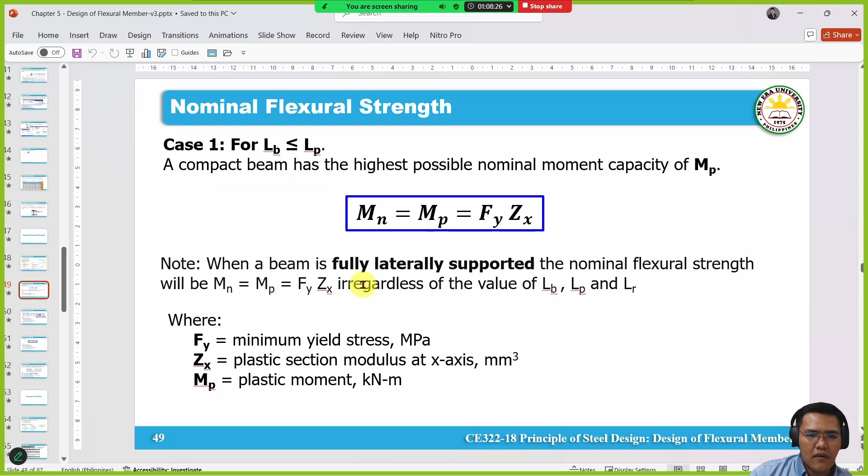Tapos ano lang siya, naka-ratio siya, ratio ng limiting lengths: L sub B minus L sub P over L sub R minus L sub P. So basically, just to give you an idea, parang ratio na lang ito, equation of a line lang to. Parang kinuha lang siya dito sa graph na to, itong case 2. Equation of a line, para makuha mo yung nominal moment. Naka-base kasi siya dito kung nasaan yung L sub B, which is related kay L sub P and L sub R. Doon lang siya kinuha, itong formula ni case 2.

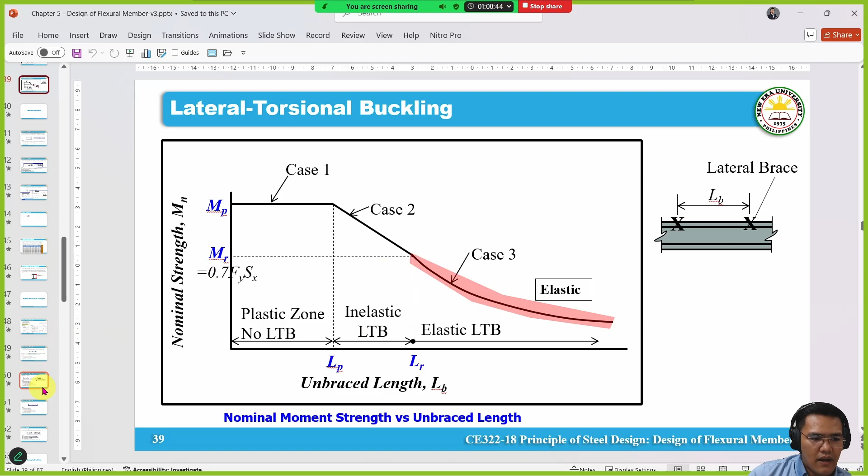And it should be compared with ano daw, plastic moment, M sub P. And ang rule is dapat kung sino yung mas mababa diyan, siya yung kukunin mo. So ano ba yung may mga bagong parameters dito?

Meron, number 1 yung C sub B, defined as lateral torsional modification factor. Discuss natin mamaya yan sa example problem number 2. Yung M sub P okay na, F sub Y, S sub X okay na. So basically yun lang, yun lang yung bago dito. So okay, try natin discussion mamaya.

So for case 3 naman, L sub B mo is greater than L sub R. Ito na yung formula na gagamitin mo, nominal capacity, ito yung nasa last part nung figure, nandito sa baba. S sub X mo daw, nominal moment mo is equal to S sub X times F sub CR, and it should be less than M sub P.

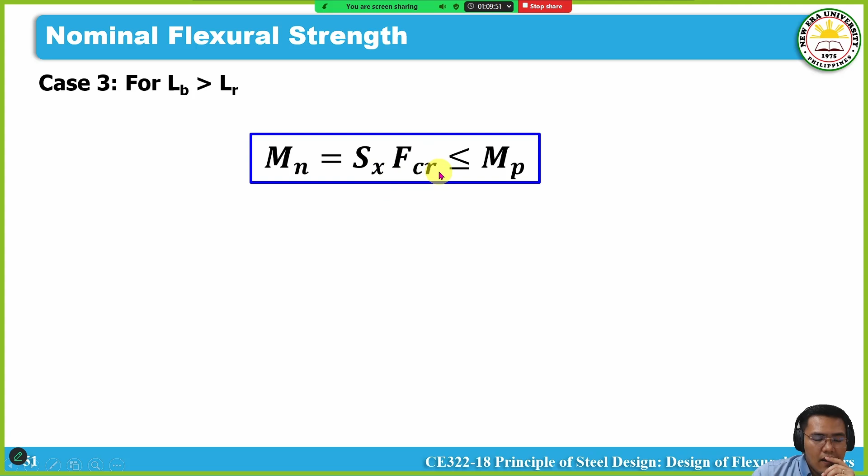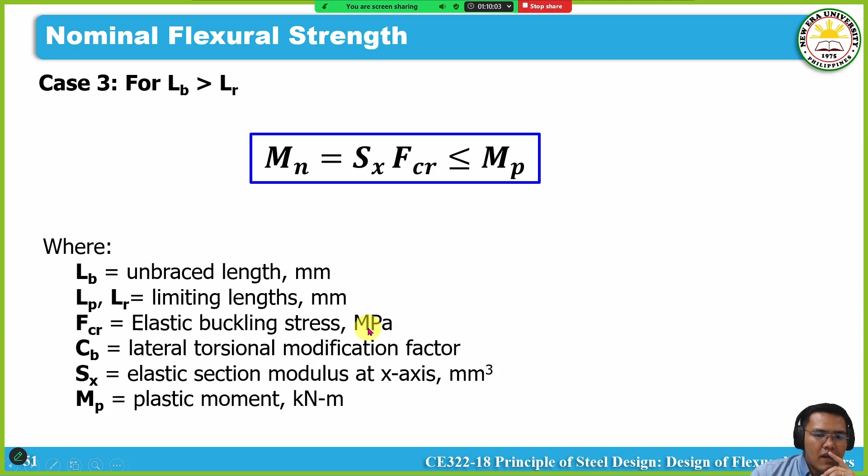Okay, so meron tayong mga bagong parameters, na halimbawa itong F sub CR. So define siya as the elastic buckling stress, MPa. Paano siya kina-calculate, i-try din i-discuss mamaya pagdating sa example problem. Okay, so ngayon i-skip na tayo diyan.

Now the overall flexural strength natin, for a doubly symmetric compact section, for example yung wide flange, bent about their major axis, gagamitin mo yung nominal moment capacity or strength to convert into LRFD. Ito yung maging equation natin: M sub U is equal to Phi sub B times M sub N, and kung ASD yan, that is M sub A, it should be equal to M sub N over the omega sub B.

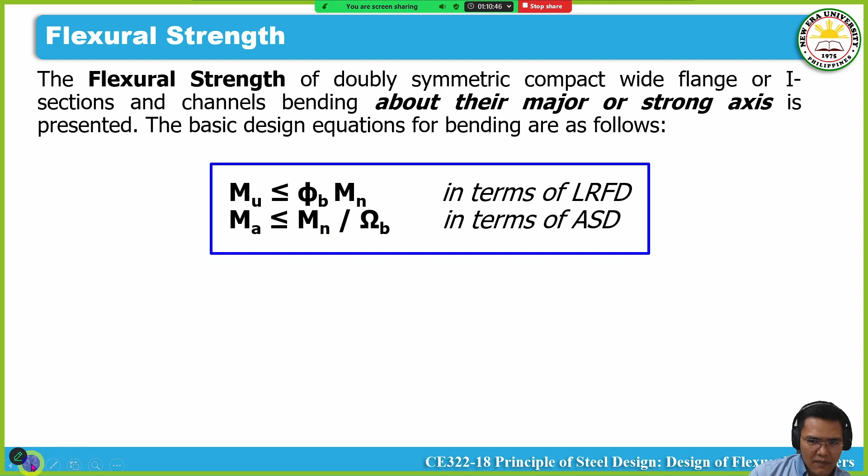Gusto ko lang i-emphasize na kapag yung design strength natin, yung strength reduction factor for Phi sub B under LRFD, is equal to 0.9. And yung omega sub B natin for ASD na design procedure, it's 1.67. So somehow familiar, same with yielding or design of compression members.

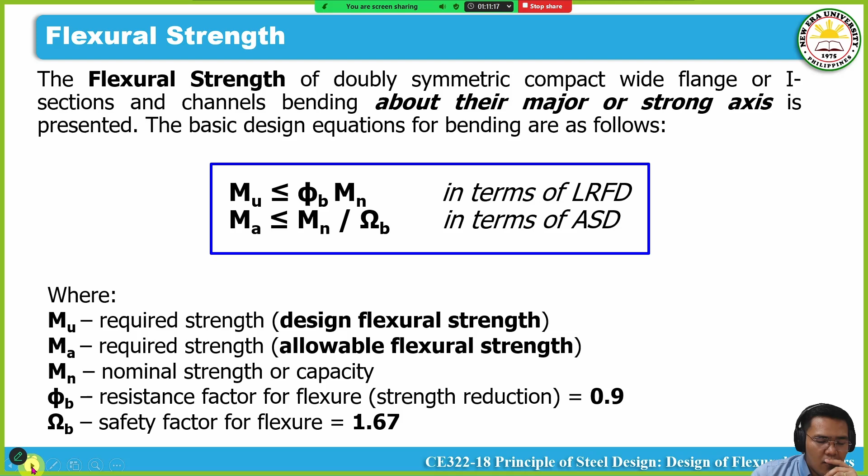Sige, mag-example problem tayo.